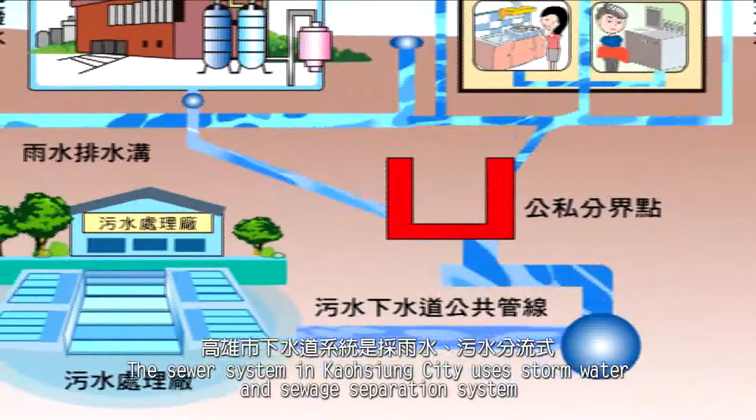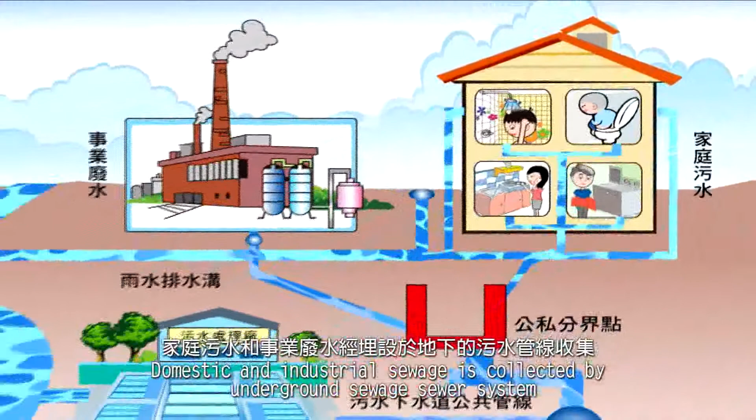Therefore, the functions of city sewer system and sewage treatment plants become quite important. The sewer system in Kaohsiung City uses stormwater and sewage separation system. Rainwater is collected by stormwater sewer system and directly drains to rivers and the sea. Domestic and industrial sewage is collected by underground sewage sewer system, processed in sewage treatment plants, and drains in surface water. In this way, cityscape environmental hygiene can be improved, as well as living quality.

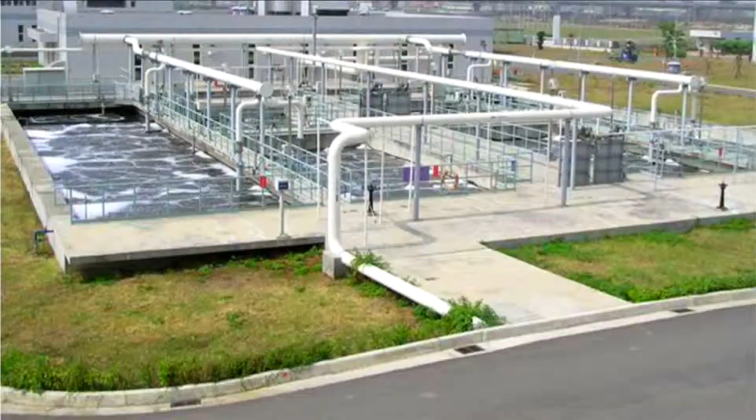Based on Kaohsiung City Sewage Sewer System Plan, there are 10 sewage districts from the north to the south. Each district has its own sewage collection system and treatment plant. Till year 2013, there are 4 operating plants: Qijin Central District Sewage Treatment Plant, Nanju Sewage Treatment Plant, Fengshan River Sewage Treatment Plant, and Dashun Sewage Treatment Plant. 2 plants are being built: Qimei and Linhai Sewage Treatment Plants.

The sewage district in Kaohsiung City accounts for 76% of the all. It is separated into east and west collection systems. West system collects city central sewage into Chenggong Road Main Pipe. East system collects suburb sewage and leads to Kaixuan Road Main Pipe. The east and west systems meet in the convergence station in Qianzhen Triangle Park. Then it passes Kuojian Road Main Pipe, crosses Kaohsiung Port District, and flows to the Central District Sewage Treatment Plant. As meeting the standards, it drains to the sea.

Within the transitional period of household connection installation, domestic, industrial, and upstream sewage is collected to sewage treatment plant by interception method. It is a high priority to improve river pollution, and household connection is actively proceeded to increase sewer installation rate at the same time.

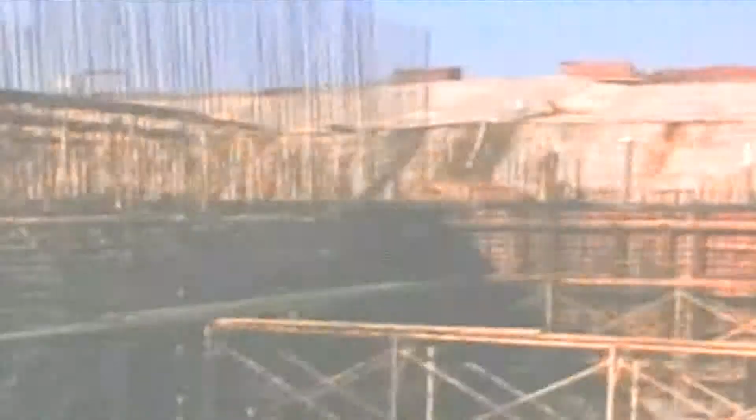Central District Sewage Treatment Plant is located in Zhongzhou Dashantou Seaside Qijin District. The plant measures 900 by 140 meters, which is 12.6 hectares. Based on Kaohsiung City Sewage Sewer System Plan, it started to be built in 1979 and was completed in 1986. It officially started to operate on 24th January 1987. The design daily processing capacity is 750,000 CMD, and the average daily processing capacity is about 550,000 to 650,000 CMD at present. It will be expanded to 1 million CMD in final period.

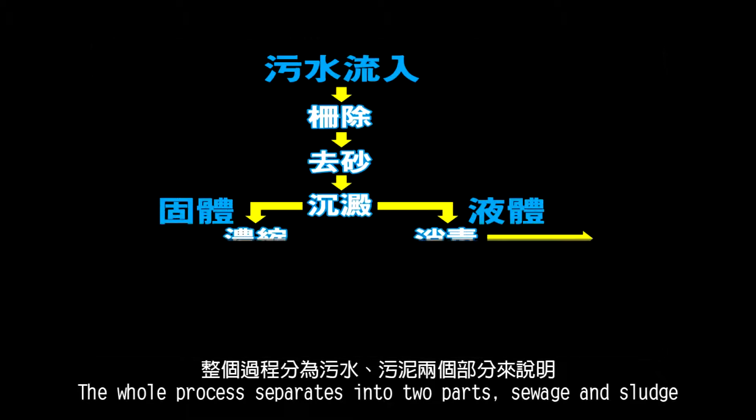Primary treatment is adopted to be sewage treatment method, and effluent drains to the sea from outlet pipe. Now let us introduce the sewage treatment process in Central District Sewage Treatment Plant. The whole process separates into 2 parts: sewage and sludge.

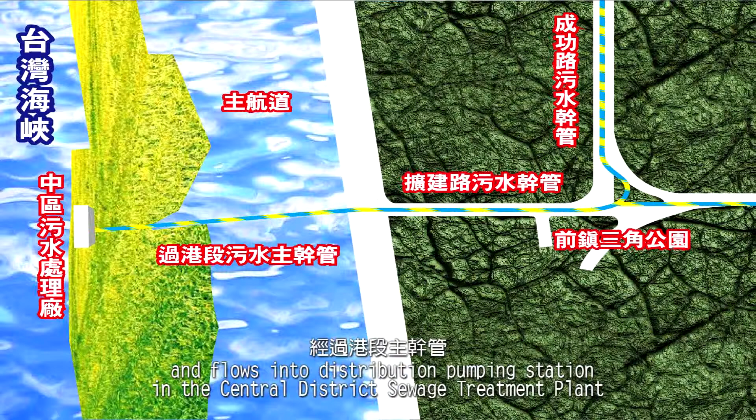First, sewage is collected in Kaohsiung City and flows into distribution pumping station in the Central District Sewage Treatment Plant through Cross Harbor Main Pipe. The pumping station is located 30 meters underground. There are 5 large pump sets in each north and south sides.

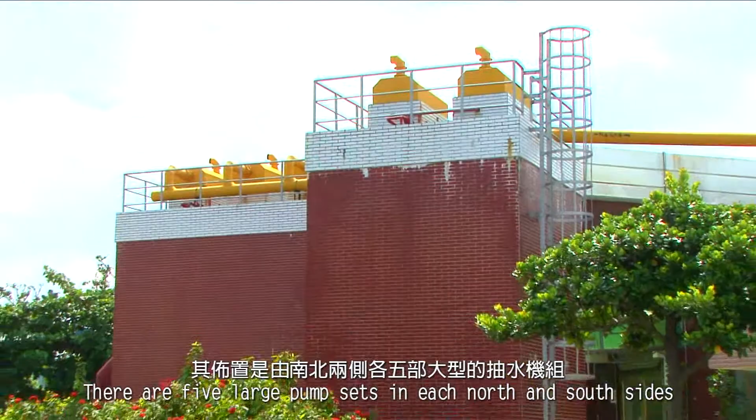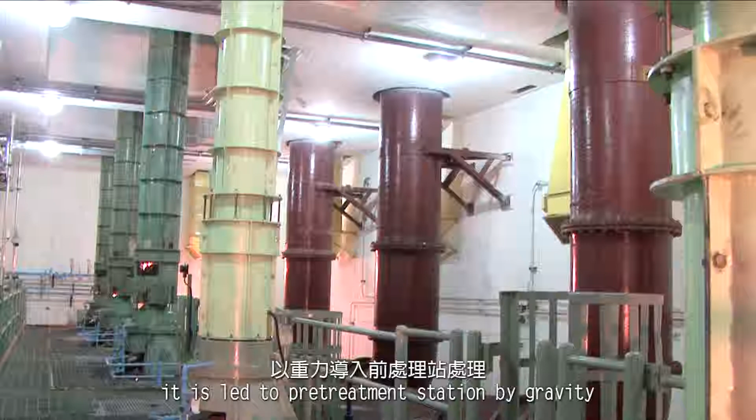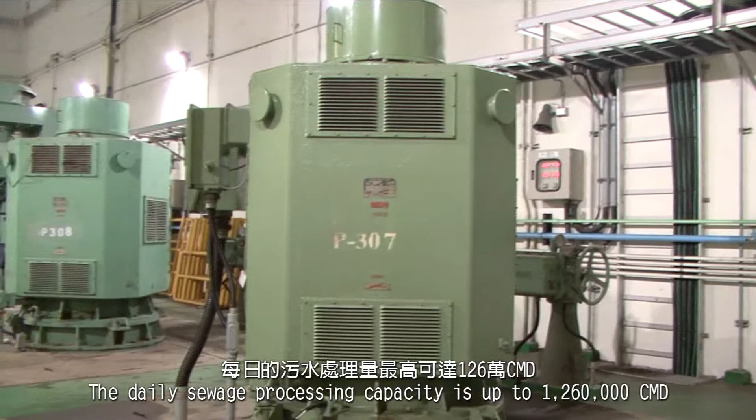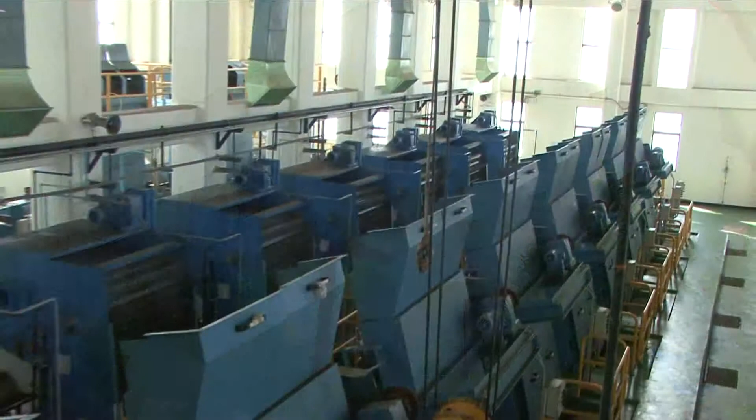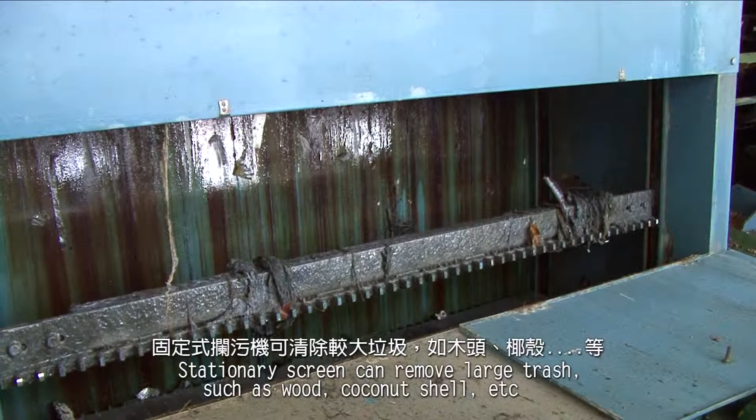The pre-treatment station uses 2 mechanical screening facilities, which are stationary screen and bar filter screen. This is also the first adoption of double screening method in Taiwan. Stationary screen can remove large trash, such as wood, coconut shell, etc. Bar filter screen can block floating or soft trash, such as plastic bags, leaves, etc.

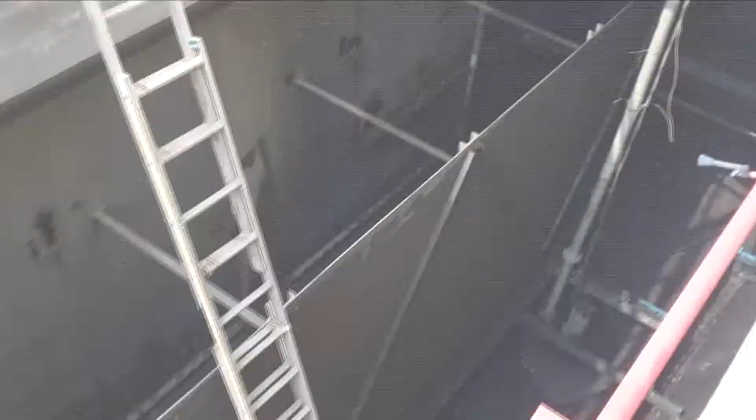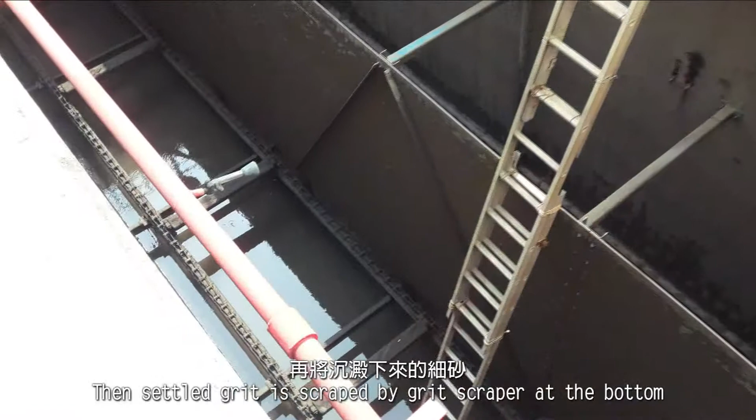Then sewage is led to grit aeration separation tank. There are 7 aeration blowers here. They stir air into sewage to separate grit. Then settled grit is scraped by grit scraper at the bottom and disposed. This is also the first funnel-type scraping grit aeration separation tank in Taiwan.

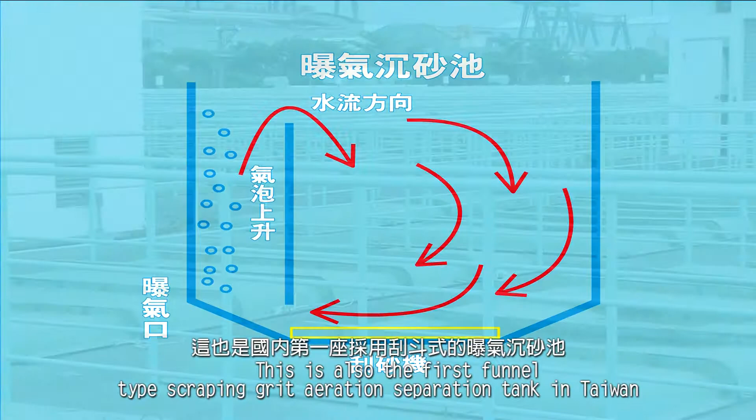After that, sewage is led to primary settling tank by gravity. Sewage from pre-treatment goes into another stage in primary settling tank. The whole primary settling tank has 30 water tanks. Every one is 12 by 50 meters rectangle shape. They are symmetrically and closely laid out to reduce tank area.

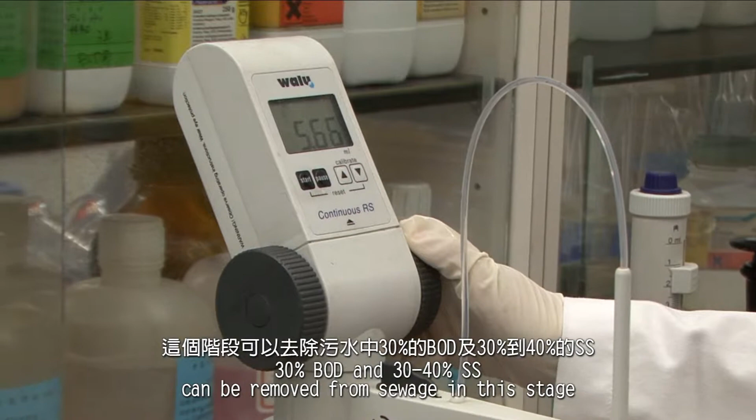They are with lids on in order to reduce air pollution. Sewage flow speed slows down here. Here, some invisible suspended particulates settle down by settlement principle. 30% BOD and 30 to 40% SS can be removed from sewage in this stage.

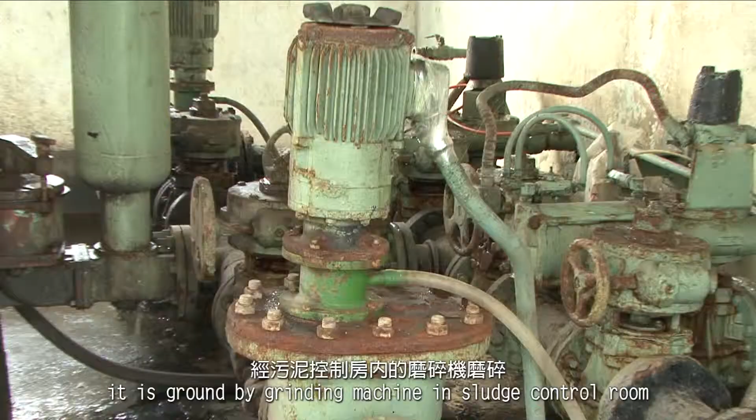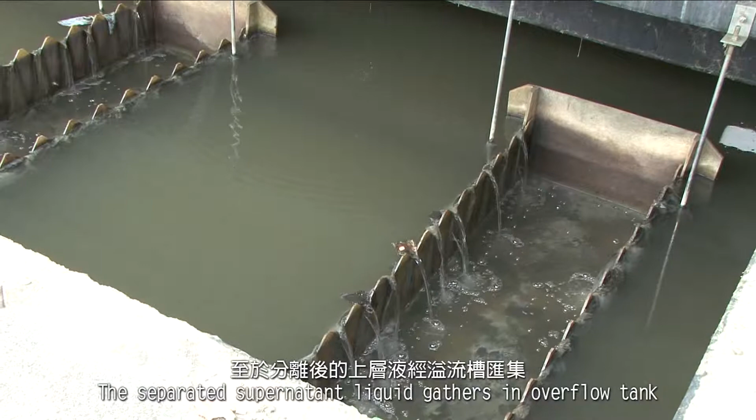After the separated sludge from settlement is collected by scraper, it is ground by grinding machine in sludge control room. Then it is conveyed to sludge thickener by sludge pressurizing pump. The separated supernatant liquid gathers in overflow tank. Via procedural pipe, it is led to disinfection pool with gravity method and disinfected for drainage.

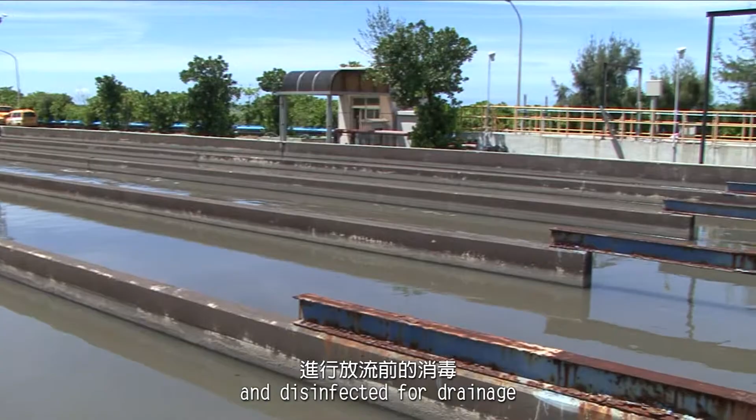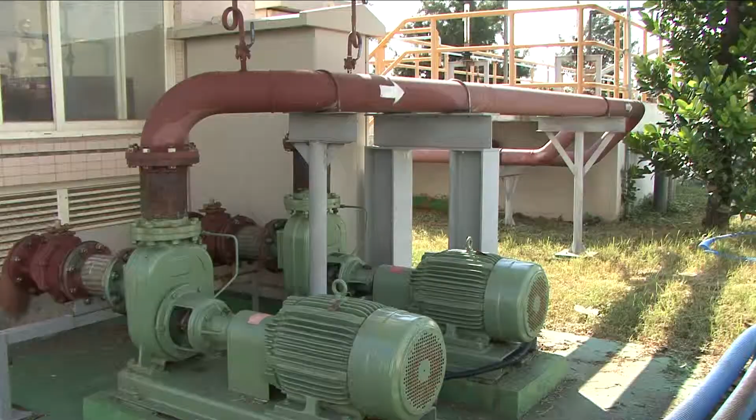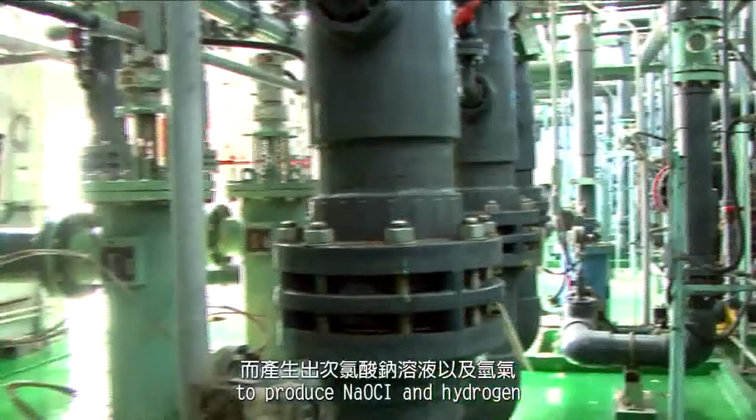The hypochlorite in the tank is made from seawater and disinfection. By using the intake facility in electrolysis station, seawater is first grid settled, pressurized with water pump, and sent to 6 sets of electrolyzer facilities to produce hypochlorite and hydrogen, in which hydrogen is released to atmosphere by cyclone separator.

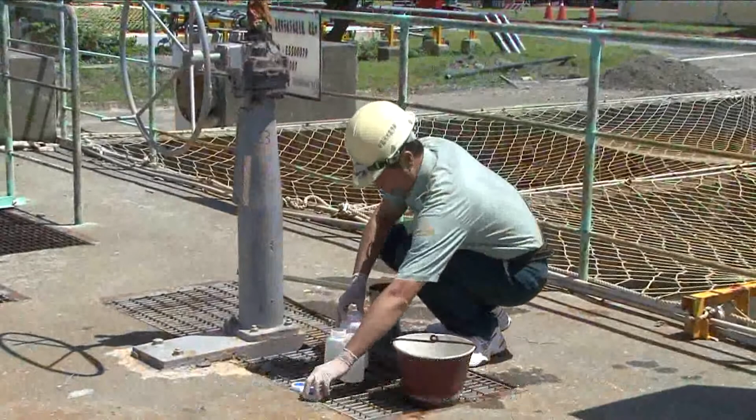NaOCl is mixed with supernatant liquid for disinfection. The channels in the disinfection pool are designed in a roundabout way to increase contact time and achieve effective disinfection. This is the first use of electrolyzed seawater in Taiwan to produce NaOCl for disinfection, which reduces the risk of using chlorine. The daily sewage processing capacity of the whole plant is detected by a rectangular weir flow meter at the outlet of the disinfection pool.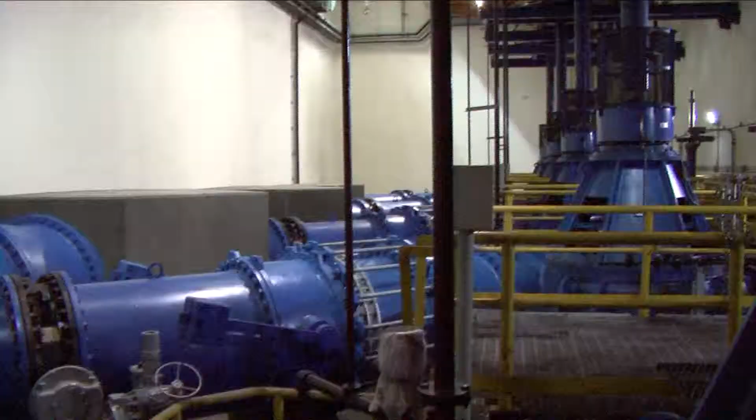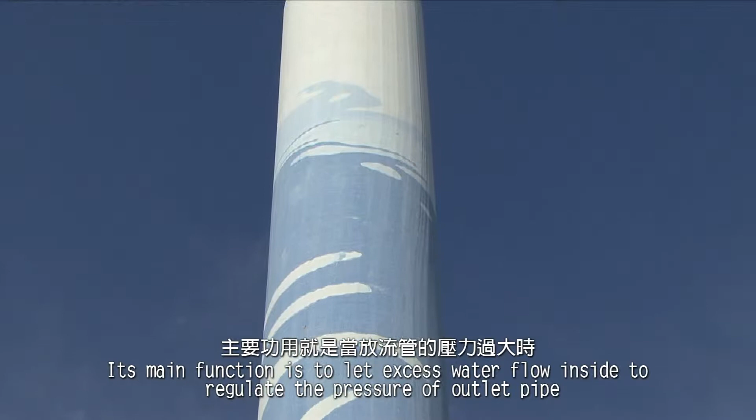The treated water is called effluent. It is led to the drainage pumping station by gravity. After pressurization by 5 drainage pump sets and regulation of the surge tank, it drains and diffuses to the sea from the outlet pipe. This surge tank, like a traditional chimney, is 40 meters in height. Its main function is to let excess water flow inside to regulate the pressure of the outlet pipe. When the pressure of the outlet pipe is too high, it can increase diffusion effect.

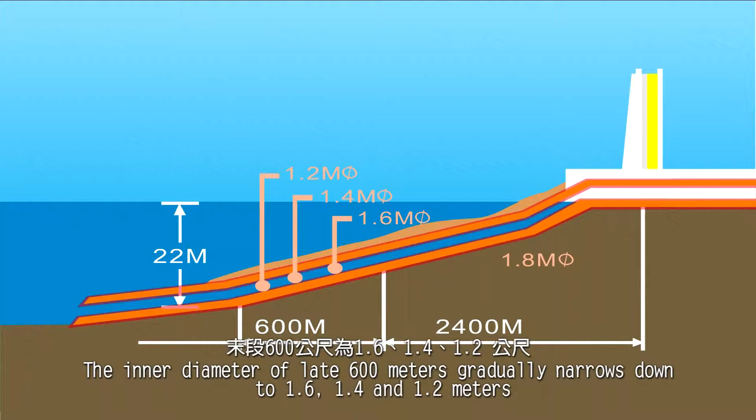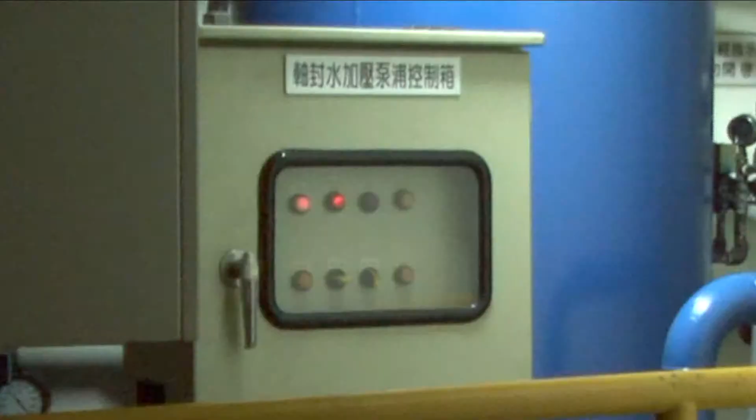The outlet pipe is a steel tube buried beneath the seabed. The inner diameter of the front 2,400 meters is 1.8 meters. The inner diameter of the latter 600 meters gradually narrows down to 1.6, 1.4, and 1.2 meters. The porous diffusion tube's inner diameter is 200 millimeters, and its outlet end is located about 22 meters under sea level. The entire pipeline has cathodic protection to extend its lifespan. Near the outlet pipes, 5 permanent warning buoys are set up to mark and warn surrounding water areas. Some effluent is recycled for plant usage, such as washing, gland sealing, and defoaming.

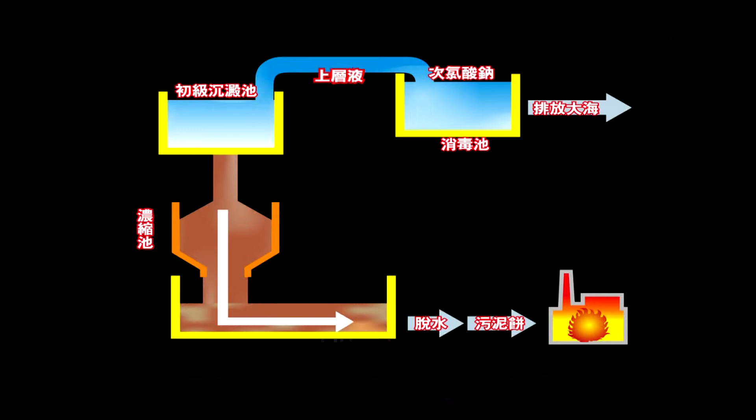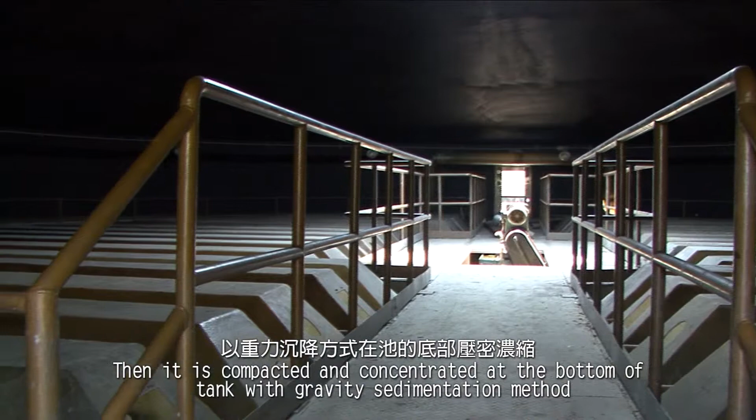Next part is sludge. The suspended particulates settled in the primary settling tank are called sludge. It is collected by a scraper and pumped into the thickener, then compacted and concentrated at the bottom of the tank using the gravity sedimentation method. This makes the water content decrease from 98% to under 95%.

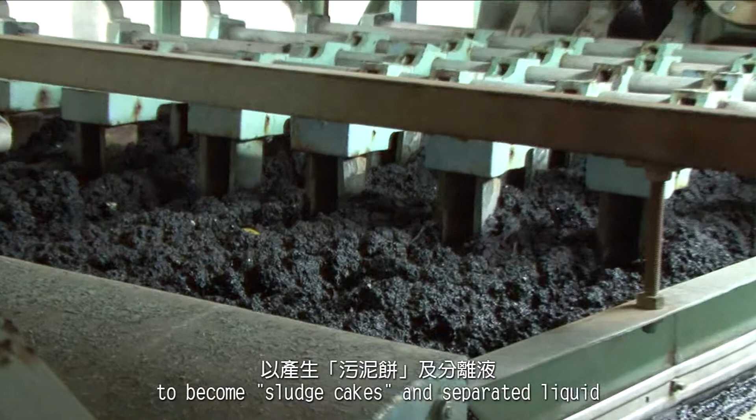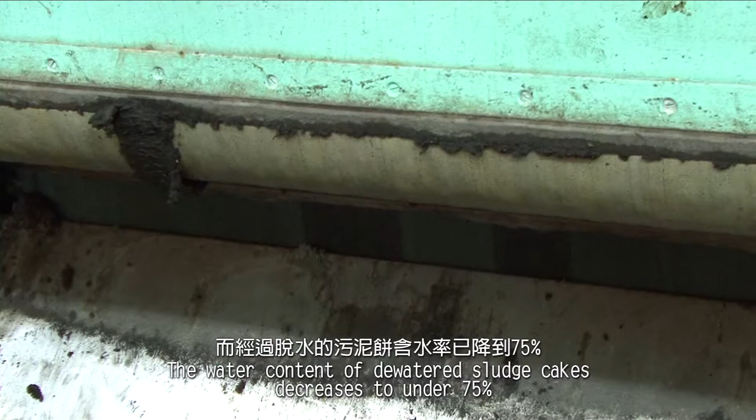The concentrated sludge is sent to be dewatered. Its purpose is to separate solid and liquid to become sludge cakes and separated liquid. The separated liquid is collected and sent back to the sewage treatment system. The water content of the sludge cakes decreases to under 75%.

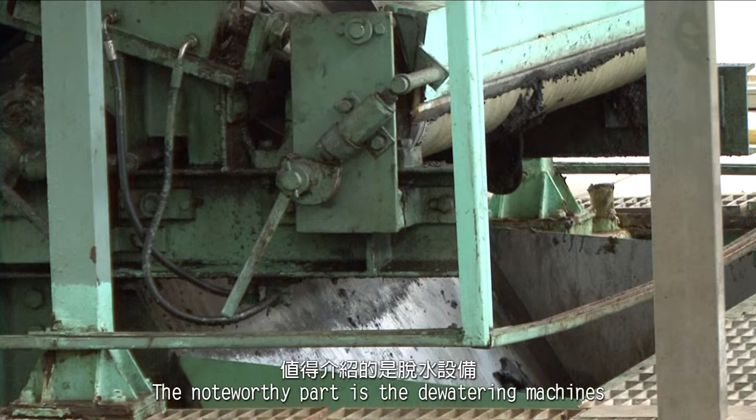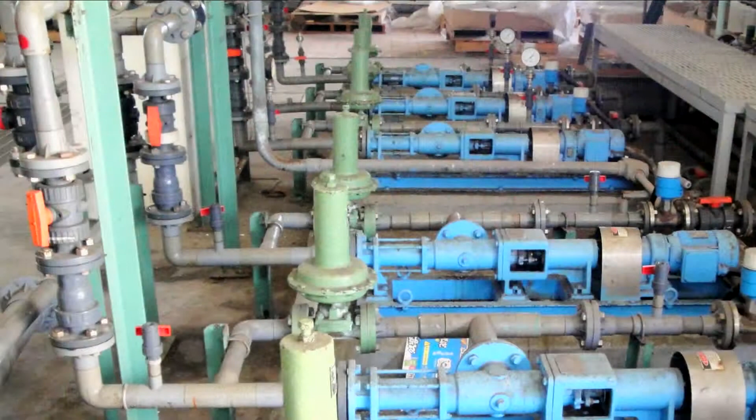There is a central sludge holding tank with a screw conveyor at the bottom, and the sludge is periodically transported by truck to the incineration plant for burning. The noteworthy part is the dewatering machines, which use the belt filtering method in the plant, using upper and lower filter belts and roller plates to dewater. To increase dewatering efficiency, polymer is added to the sludge for adjustment. This is the main process of sludge treatment.

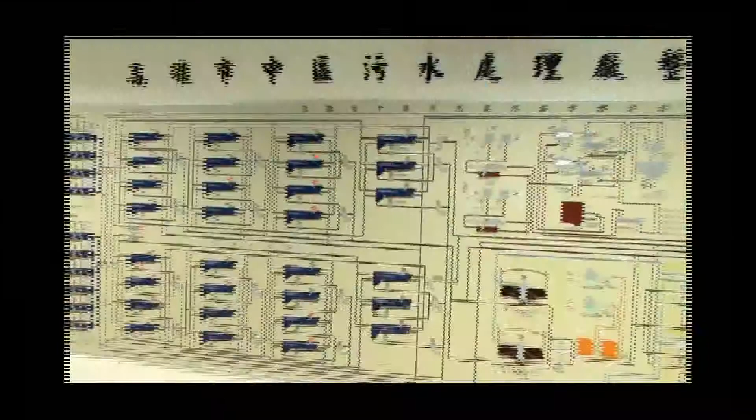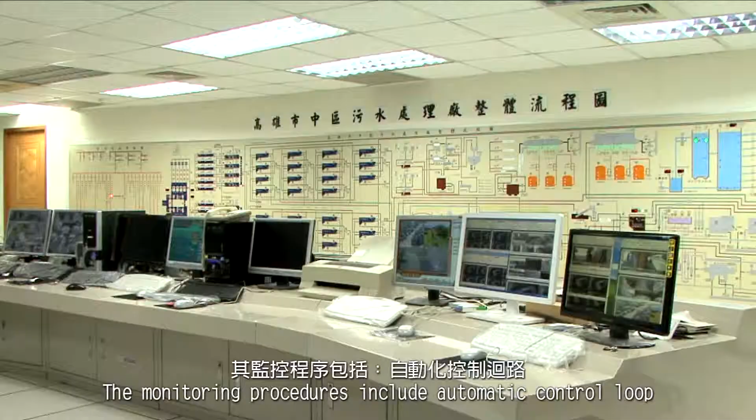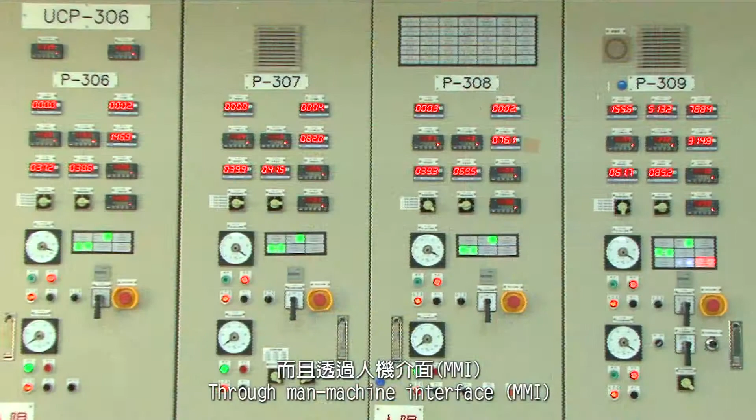Overall, this large sewage treatment plant with complex processes needs a control hub, which is the central monitoring system (PMC). The monitoring procedures include automatic control loop, processing operation, signal transmission, alarm handling, automatic monitoring analysis equipment, and safety measures, etc. Through the Man-Machine Interface (MMI), real-time information can always be obtained, and the operational status of the whole plant facility is monitored. To achieve overall control, this plant has dual-loop power supply systems and emergency generators to ensure operation without blackouts.

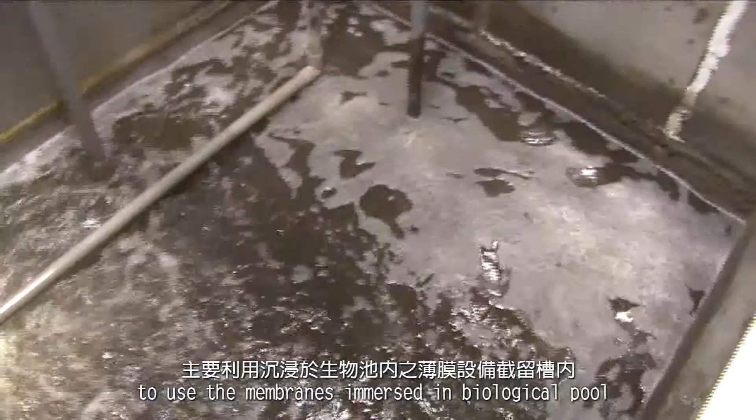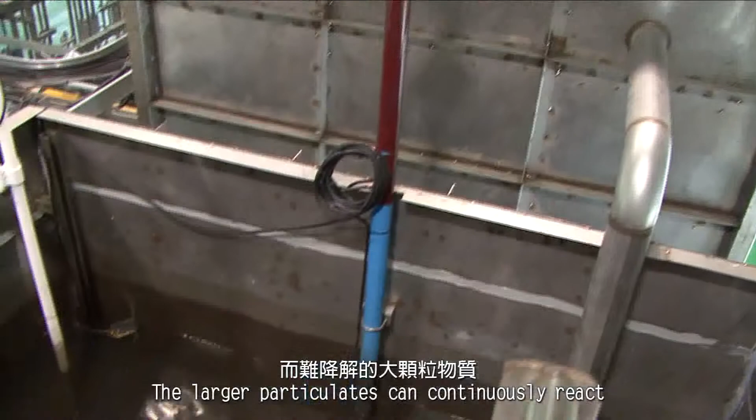Because of the increasing difficulty of water resources development, it is important to actively recycle water resources. This plant uses membrane bioreactor (MBR) and reverse osmosis (RO) systems to recycle and reuse water resources. The function of the membrane bioreactor is to use membranes immersed in the biological pool to filtrate activated sludge and solids from biological treatment and recycle clean water. The larger particulates can continuously react and degrade in the pool. Through membrane separation technology, the bioreactor function can be enhanced maximally.

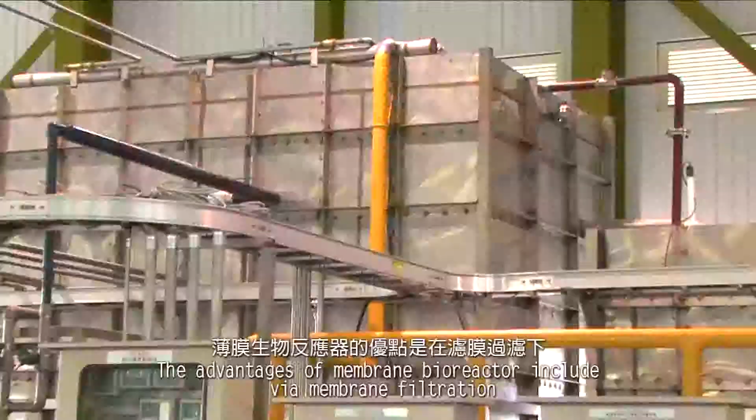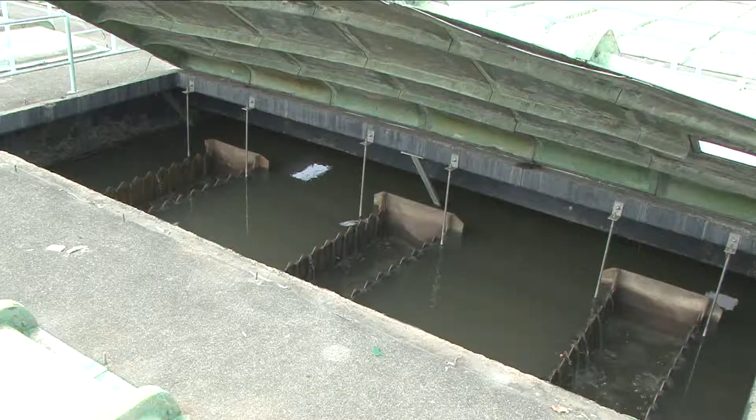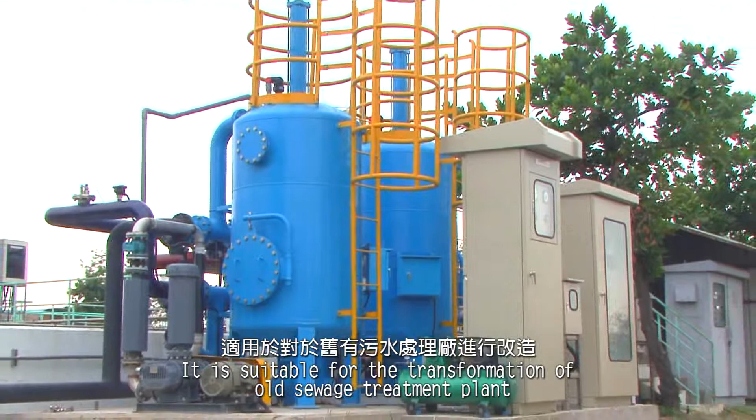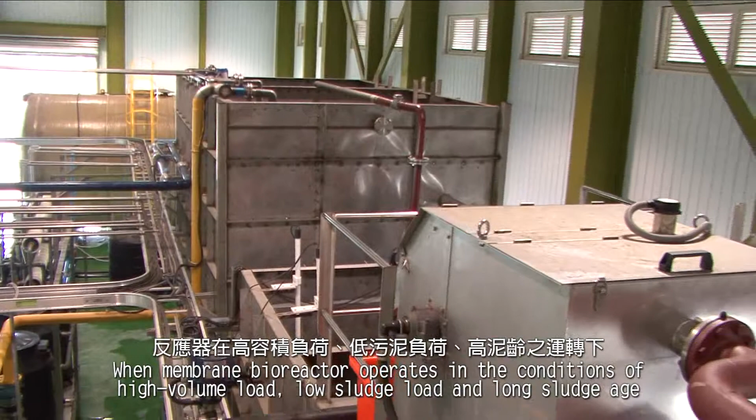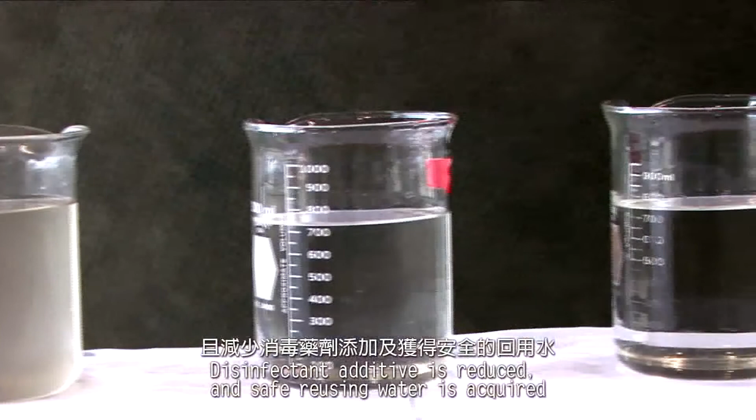When the membrane bioreactor operates under conditions of high volume load, low sludge load, and long sludge age, domestic sewage can basically achieve no remaining sludge drainage. Disinfectant additive is reduced, and safe reusable water is acquired. The membrane bioreactor treatment system is a new generation technology of water recycling.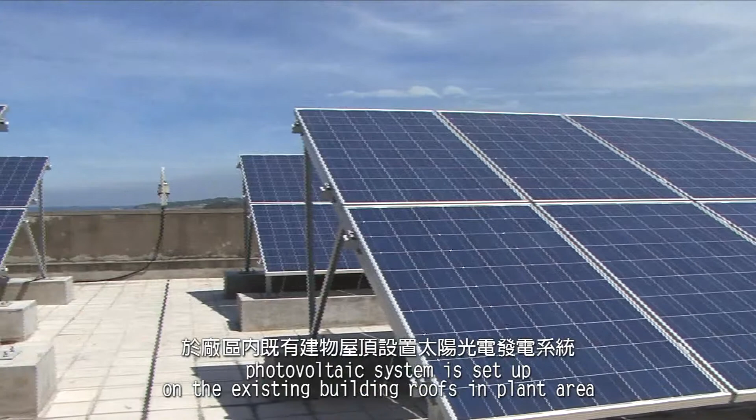In the world trend of global warming, energy saving, emission reduction, and environmental sustainable development as the premise, this plant starts off with renewable energy resources and a green city vision. Using adequate sunlight and open terrain characteristics in the area, a photovoltaic system is set up on the existing building roofs in the plant area. With the concept of energy saving and environmental friendliness, it can achieve green power efficiency.

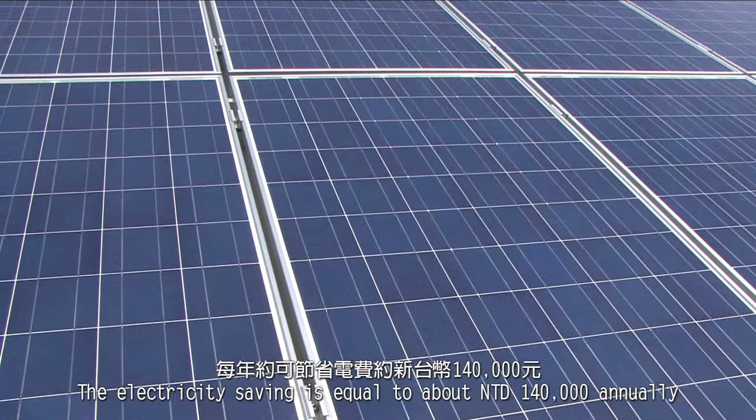The capacity of the photovoltaic system in the Central District Sewage Treatment Plant is about 58 kW. The electricity saving is equal to about New Taiwan dollars 140,000 annually. The system is set up on the roof of the existing pumping station building, and the generated electricity is delivered and used within the plant area.

Its characteristics are: 1. A monitoring system is set up in the plant, and personnel can check generating capacity through computer at any time. 2. It provides clean and non-carbon electricity to the North Drainage pumping station and reduces electricity costs. 3. The system can be used as a regional energy educational demonstration to promote solar power and deeply embed the concepts of resource conservation and sustainable development.

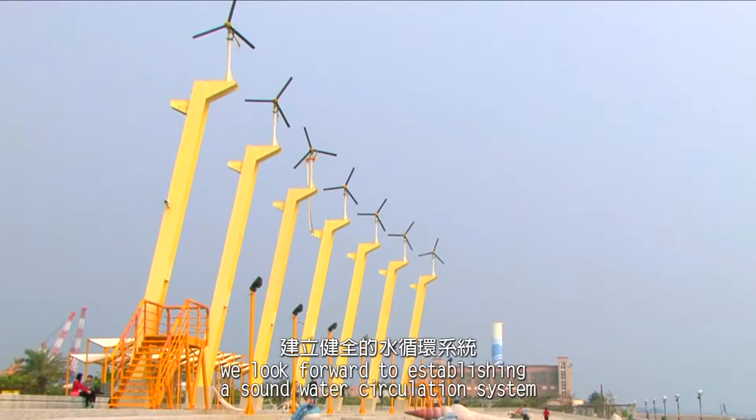Water is the precious resource of the earth. Through sewage treatment, we look forward to establishing a sound water circulation system to make us and future generations able to enjoy clean water resources. We shall work together to improve our living environmental hygiene and create a comfortable modern living space.